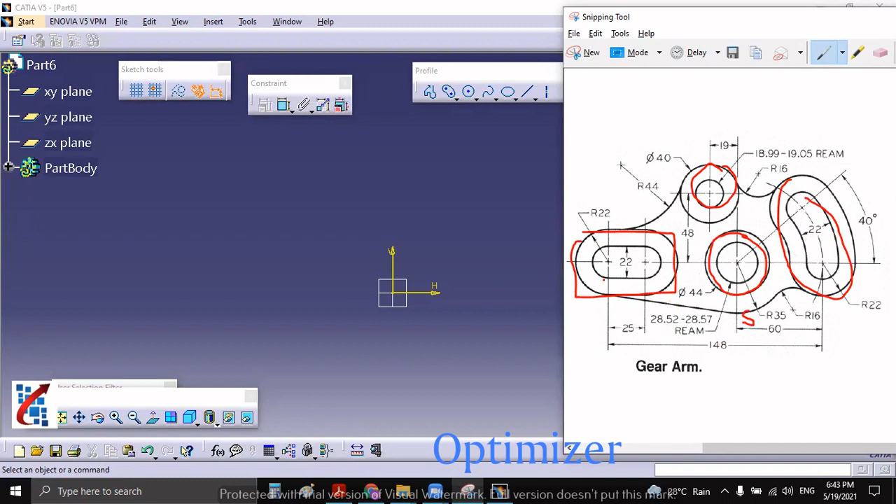In this video, we are going to draw a gear arm sketch. It looks a little complicated, but when you divide any sketch into small parts, it is easy to draw. For example, we take this elongated hole as part one, this circle as part two, this cylindrical elongated hole as the third part, this one as the fourth part, and this outer line as the fifth part. When you draw in a stepwise procedure, it is very easy to understand. So let us start.

I am going to consider this as the origin, and then draw this elongated hole as the first step. Let us start. Go here, select elongated hole. You can draw like this, and draw like this. Okay, the elongated hole is finished.

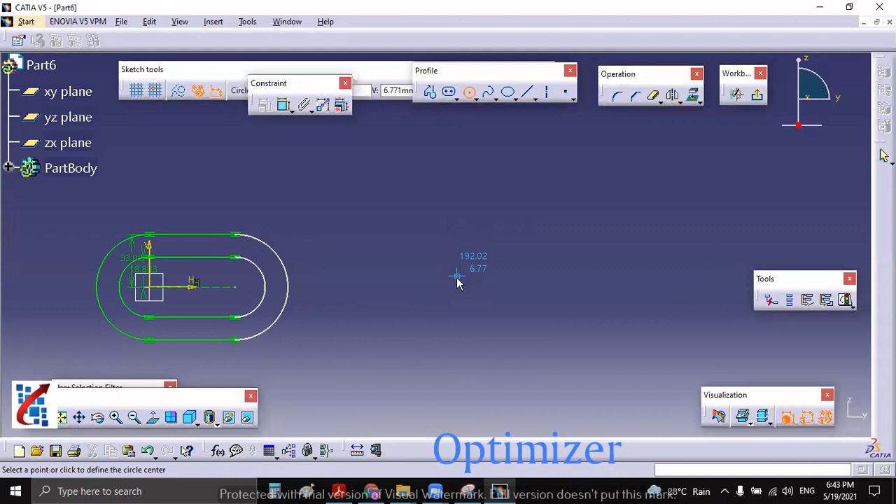Now these circles, just double click the first circle, and one more circle we need to draw here like this.

Now we can give dimensions of these two steps. If you see, this is Ø22 and R22. So this is 11, because that is Ø22, and this one is R22. Now the center distance is given as 25. So just go here and mention this as 25.

Now the next part, yes this is R22, identity. Next part, you need to define this. This is Ø44 and R34. So R34 and Ø44, so diameter is 44.

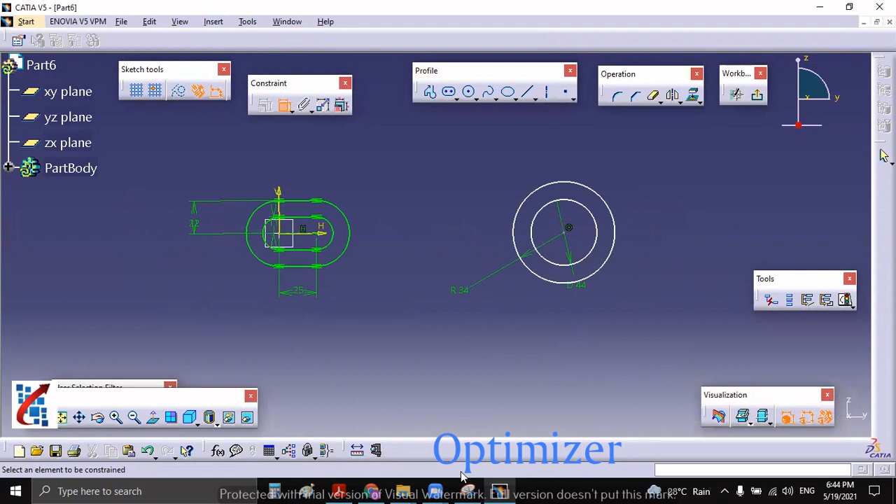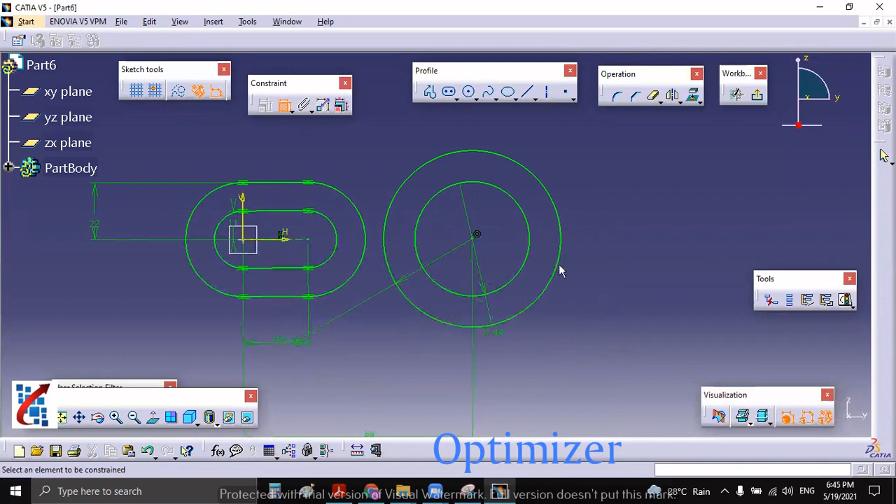We have given the radius and diameter of this one, but the center distance we didn't define yet. If you see, this is total 148, out of this is 60. So the center distance between this and this is 148 minus 60. You can give the center distance between this point and this axis as 148 minus 60. Now we have completed this.

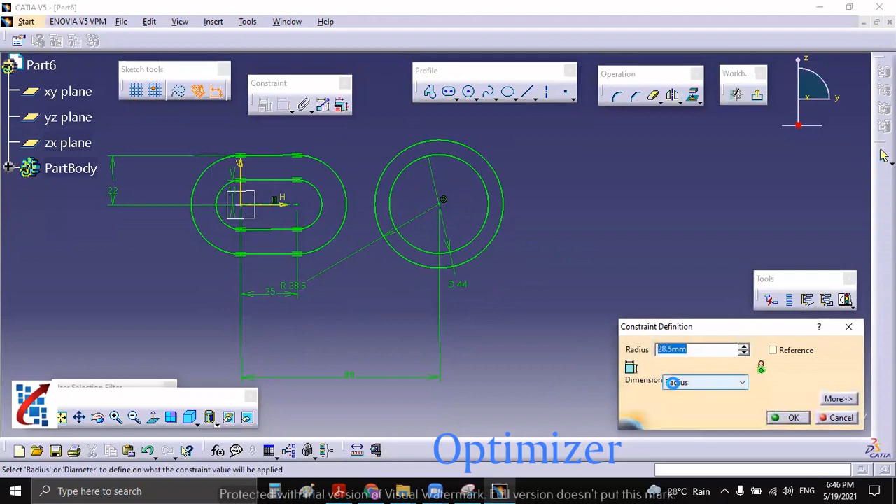We made one mistake - this R35 was given for the center dimension of this circle, but this inner circle is around 28.5. So let's correct it. Go here and this is 28.5. So 28.5 is the ream, meaning diameter. Go here and make that diameter 28.5. Now it is okay.

So we have completed our second step. Now the third step is this elongated hole. It starts from here and ends at 40 degrees from this one. Let us start.

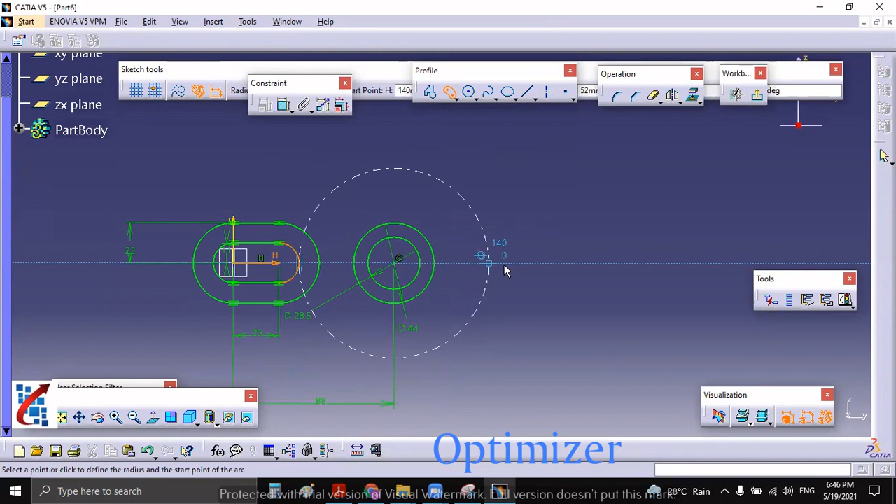One more thing - the center of this elongated hole is this center. Then for the cylindrical elongated hole, the center starts from here to here, and it will be like this. We require one more like that - again we start from here, select this to this, and this. So we have finished this.

Now just give the dimensions. See, these 2 points are not coincident. Make them coincident - select first center, second center, go here and make them coincident. Now you have to draw one axis line between this center and this center, because we need to define a 40 degree angle. Go here, from this axis to this, it is 40 degrees. Just define that 40 degrees.

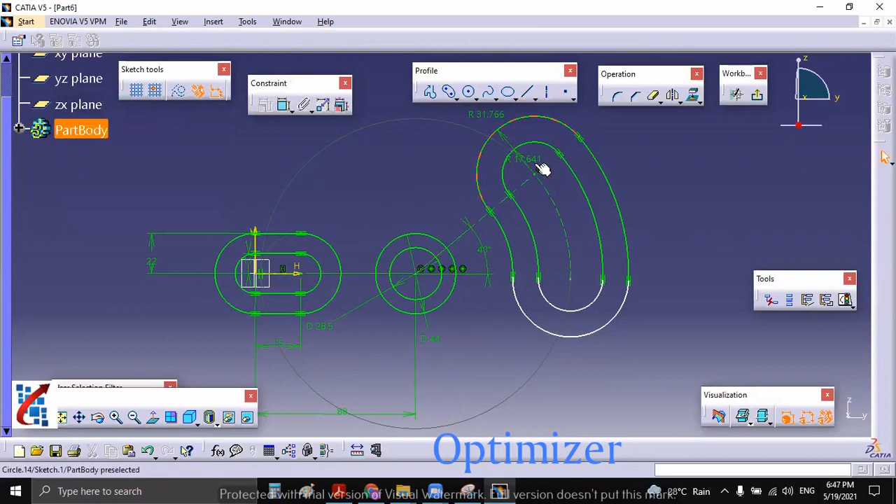Now you need to define the radius of both. The outer is R22 and inner is R22, Ø22. So the inner was only 11 and the outer was R22.

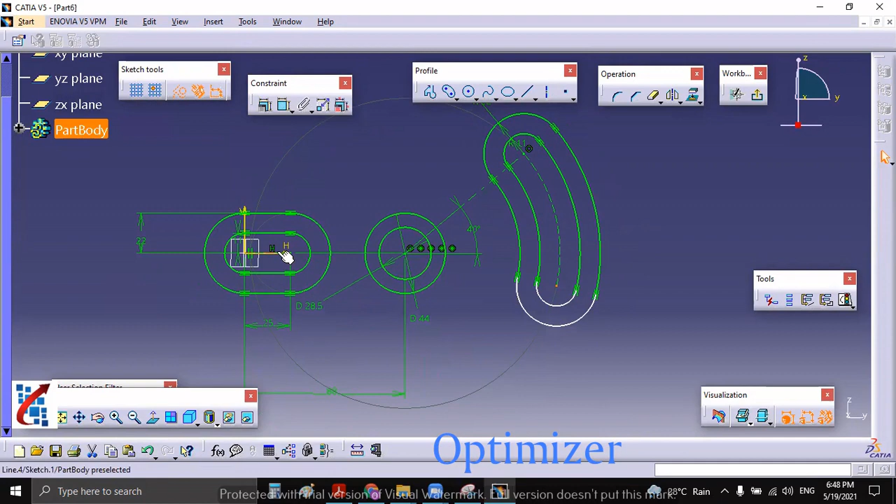Now, this is not coincident with this horizontal axis. Just select both and go here and make them coincident. So we have completed our third step.

Now the fourth step is these two circles. These two circles - see, it is around 19 mm offset from this center line, and it is 48 mm in height with this horizontal axis. Just draw that - again double click, and don't take any reference.

First circle. So don't take any reference. Randomly you need to draw.

Now you can give the dimension. So from this center to this center, you need to take a horizontal distance. Just right click here and make the horizontal measure distance. And from this to this, again you need to find vertical distance.

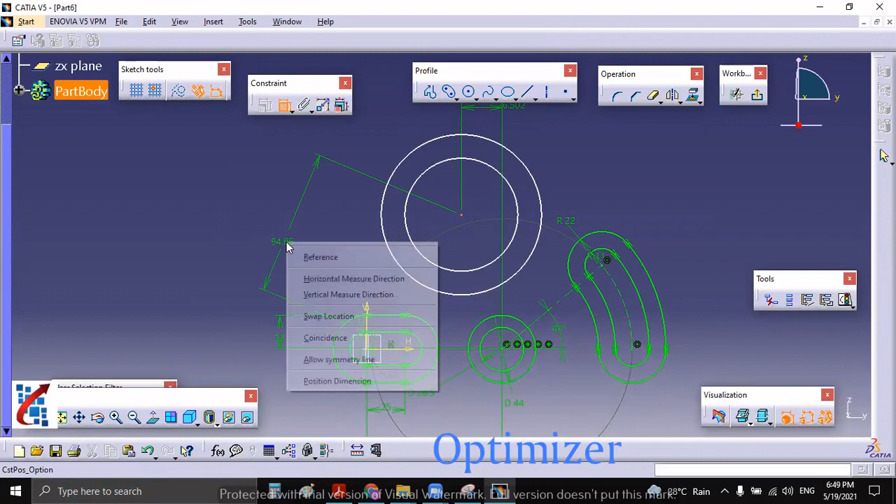Correct? So it is 19 and 48. So 48, and double click here 19. Just give the dimensions now.

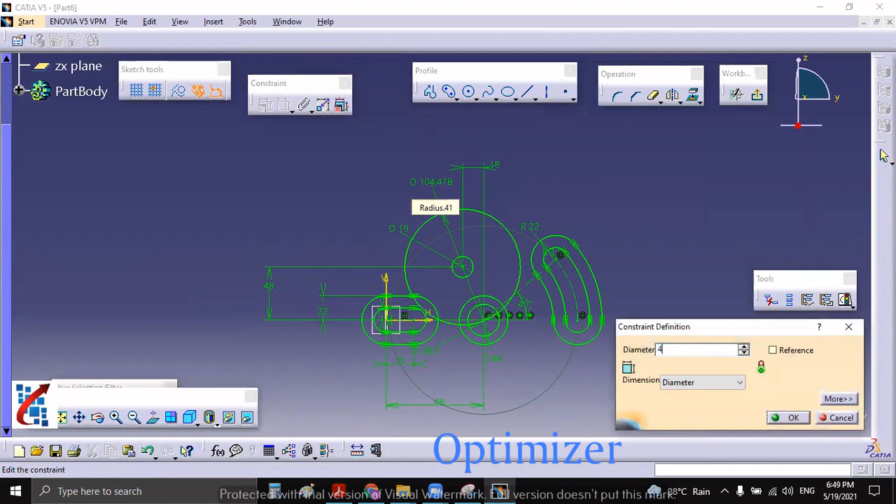So it is around 19 and 40. Diameter, first diameter is 19. Next one is 40. Okay. I hope it is understood to you.

So we have completed 4 steps. Now you need to join all these parts. So how to join this? Now we have to focus on outer geometry, like this one. So let us start from here.

There is an R44 circle which is tangent to this circle and this circle, and there is one R16 circle which is tangent to.

So one thing we have missed out, that this center distance we didn't give. Okay, so by mistake, this is... sorry.

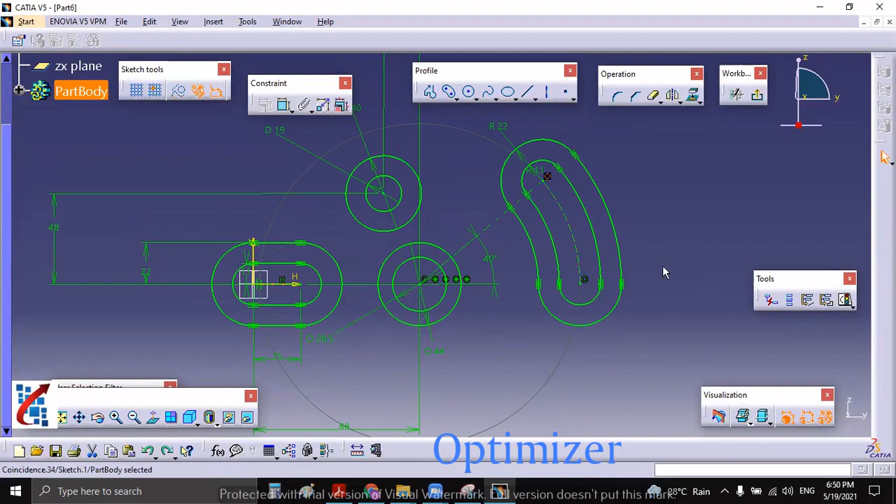So I have told you that don't take any reference. So by mistake here the reference is taken for this center circle. Okay, so just you need to delete this.

Now you have to define the center distance between this vertical axis and this, it is around 148. So just double click here and make it 148. Correct. Yes. Now it is right.

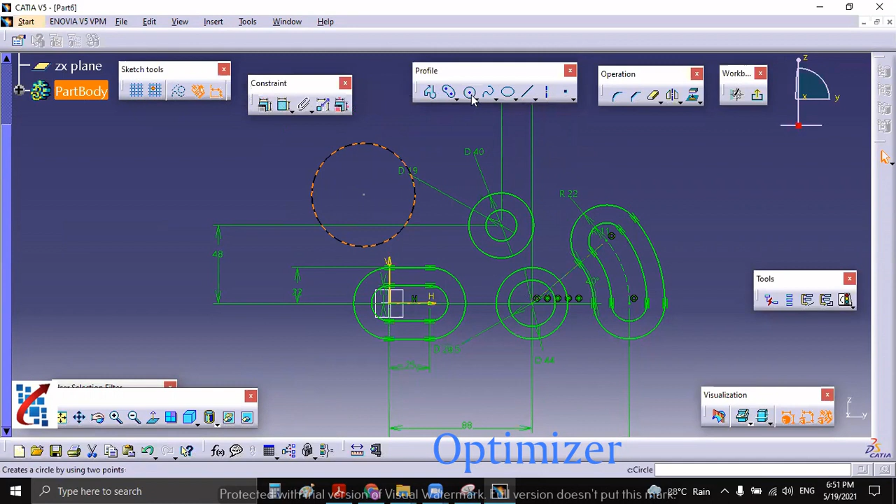Now two circles are there. First one is like this, and second one, one more circle is there, which has to be placed here.

Now this and this are tangency, and one more, you select these two circles and make them tangency. Again, this circle should be tangent to this circle, tangency, and this line again tangent to this line. Make them tangency again. Okay.

Now you give dimensions 44 and 16. So just go here and make them. It is radius 44. Just go here and radius 44, and this radius is 16.

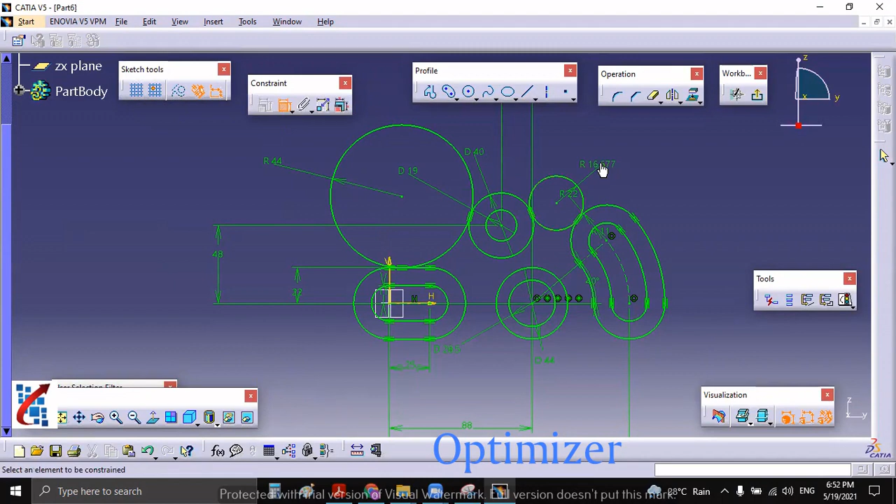Correct. Now you can trim all portion. So we don't require this. Correct. So we have completed the above part.

Now this below part is only remaining. In that you need to define, you need to draw this R35 plus and R16, again tangent to this circle and this circle. So let us start. And one more line is there which is tangent to this and this.

Okay, R35, R16. So just double click here, take this and like this. Just go here and make this R35, 35, correct, and just select these and make this 16.

Now you can select these and make it tangent to this arc. So tangency, again select same circle, select this bigger circle and make them tangency again. Make them tangency. So tangency.

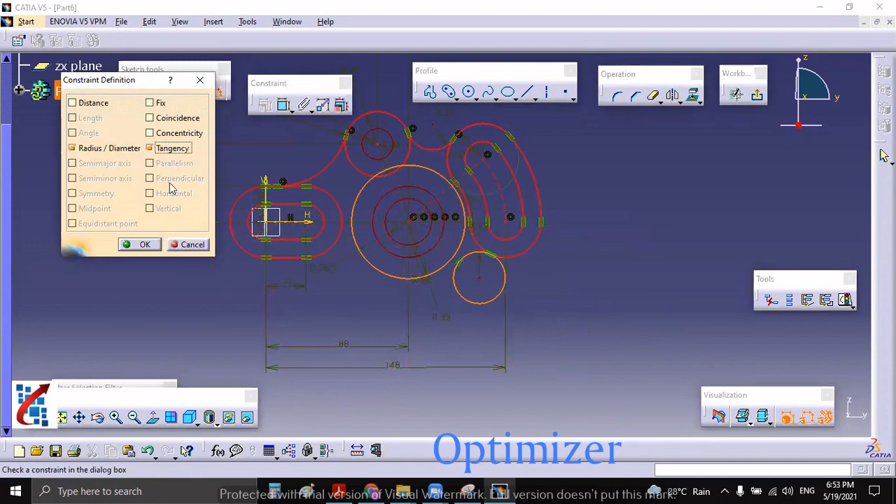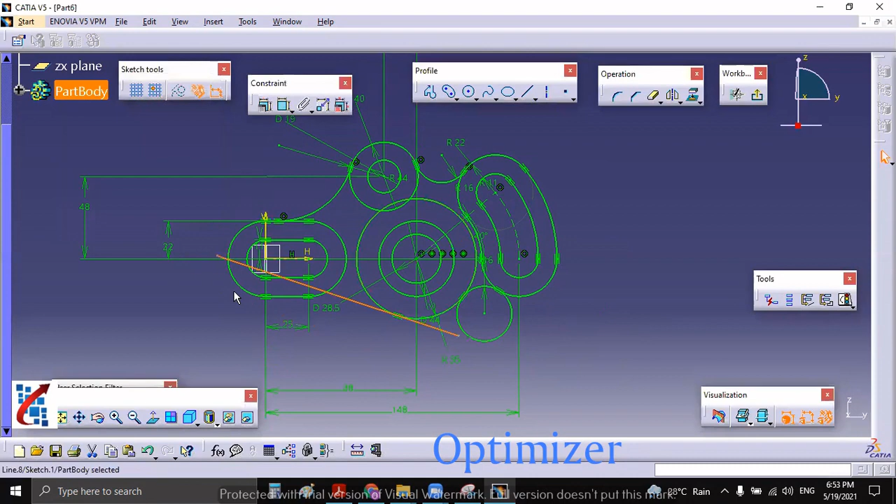Yeah, tangency, correct. Now again, one more line is there, which is like this, which is tangent to this circle, tangency, and again tangent to this circle, like this.

Now again you can trim all unnecessary part. So we don't require this also, and also this one. Okay.

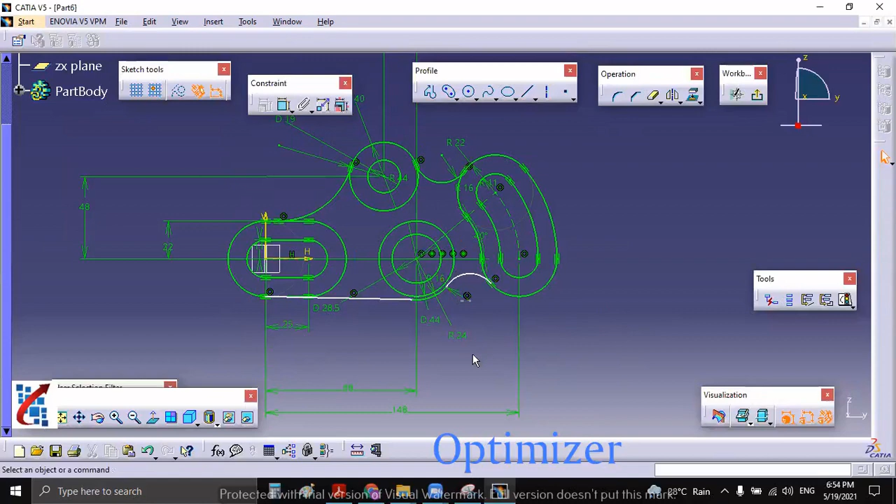So I hope this diameter is missed now. So just go here and give that R34, like this. It's R, not R, okay, R34, not 24, R34, and this should be concentric with this. Concentric, click on OK. And this line and this line are tangent to each other.

Already we have made it, but while trimming, many things are automatically vanished. So you need to give it once again. Yeah, now it is fully connected.

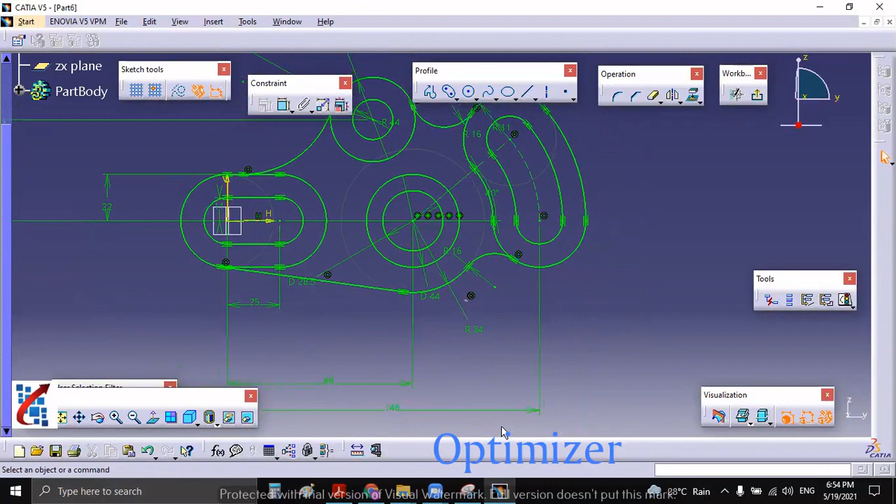So this is what, we just compare this and this. We have covered all the things. Okay, so I hope you understood the process. So you need to just divide a total complicated sketch into small pieces and then start with it.